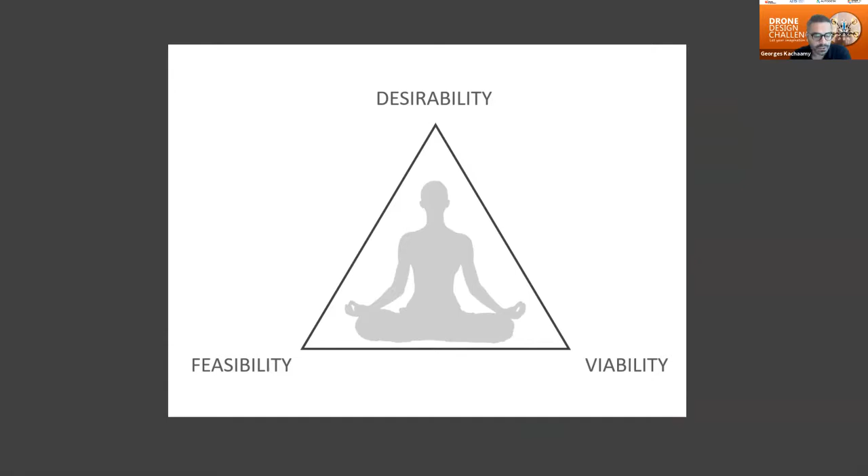What I admire the most about the UAE in general and Dubai in specific is that this place truly manifests Mandela's saying that it always seems impossible until it is done. So please, whenever you feel demotivated and not wanting to continue, always remember this sentence and never give up.

One might say, yes, making a drone fly is one thing, but a building, of course, it is something else and it's impossible. But it seems one guy disagreed when he said, if you can levitate a train that weighed 50 tons, why not a house?

And here where my challenging journey has started, you see, I always been fascinated by the celestial bodies, the moon, the sun, the stars, and always wondered how can something that massive be floating like this in our skies? Of course, science explained many of these things, but it did not deter me from keep wondering.

I was not the only one and will not be the last. Many before me and many after me will still be fascinated by that and will still contribute in this ongoing research on how we can defy gravity and liberate ourselves from it.

One of the outcomes that took the attention of the public was the Rising Oases series of prototypes that I usually do: the spring, the river, and the waterfall. These series are prototypes that came out of the ongoing research that I'm conducting to date.

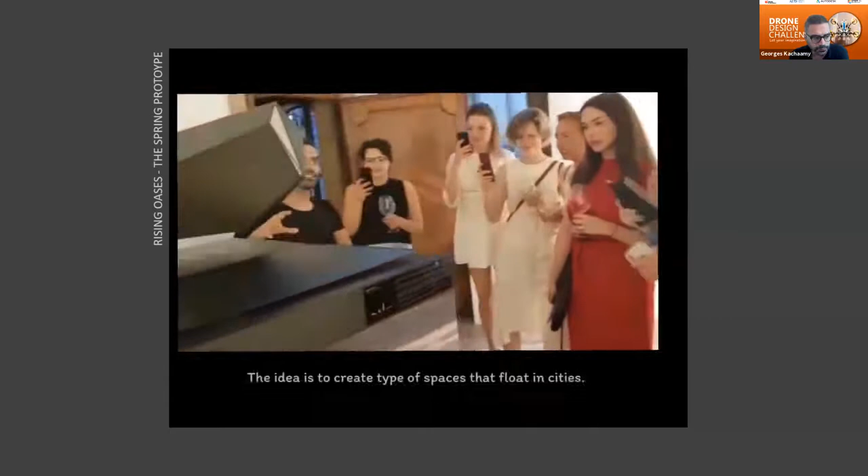So this is actually one of the exhibitions where it shows in Venice, it shows one of the prototypes floating. The other one that actually was done here in Dubai Design Week.

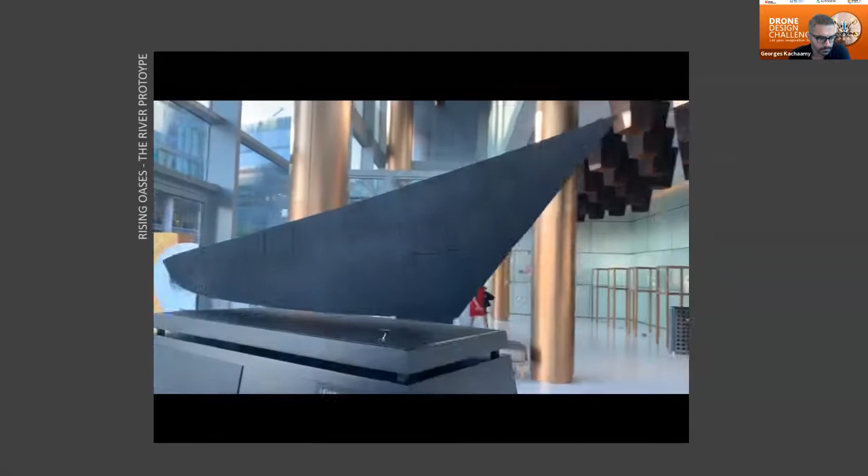The third one is actually still ongoing, and for this one we did a bit of a different way of exhibiting it because of the pandemic and the situations we are all in. We generated a prototype that was virtually built in a virtual city, where you can use virtual reality and access it and see it at one-to-one scale. This gives a different experience because of the situation that we are in. This is a small animation of it.

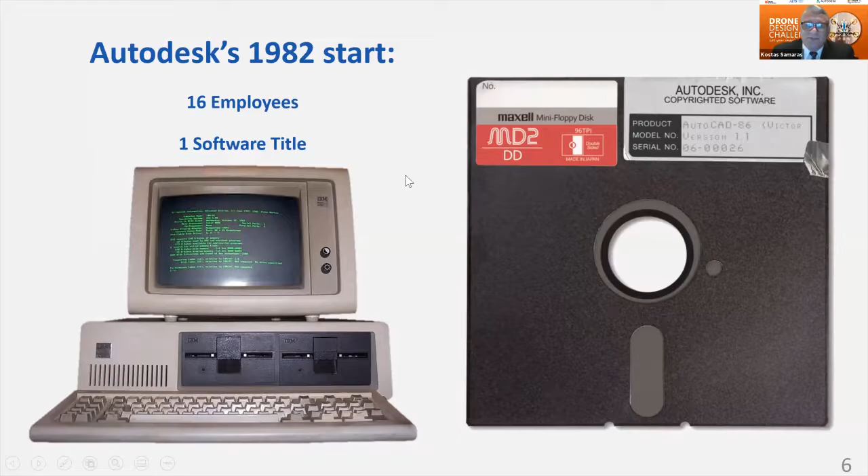Right now, as a company, we're about 14,000 employees worldwide, and we have more than 300 design software titles available, and Tinkercad is one of them.

Now, what Autodesk is doing for education - I have quite amazing and exciting news for all the students, the parents, of course, the schools, and the teachers.

So our contribution to education: we provide free access to all our software, and the software is very professional type of software. All our software is free of charge for all students, whether high school students, primary students, or university students. All our software is free of charge to download.

We have free learning resources, and we provide free training for teachers and educators. Also, we have several workshops and competitions, and we've created a student expert program, as well as some sponsorships.

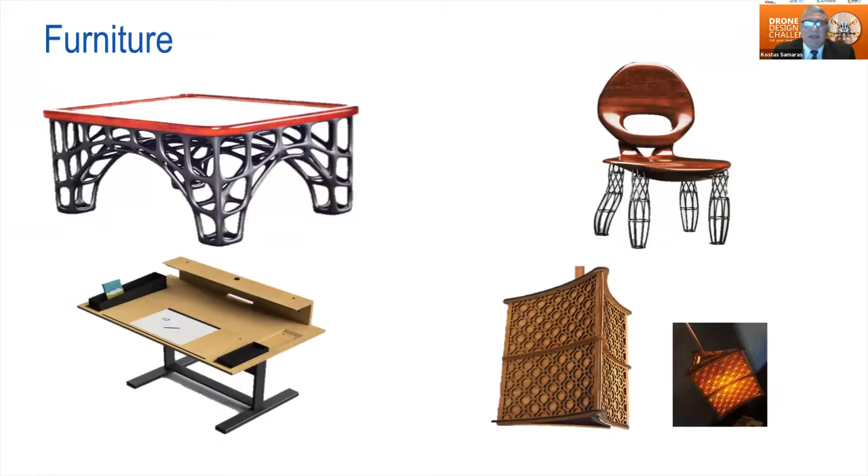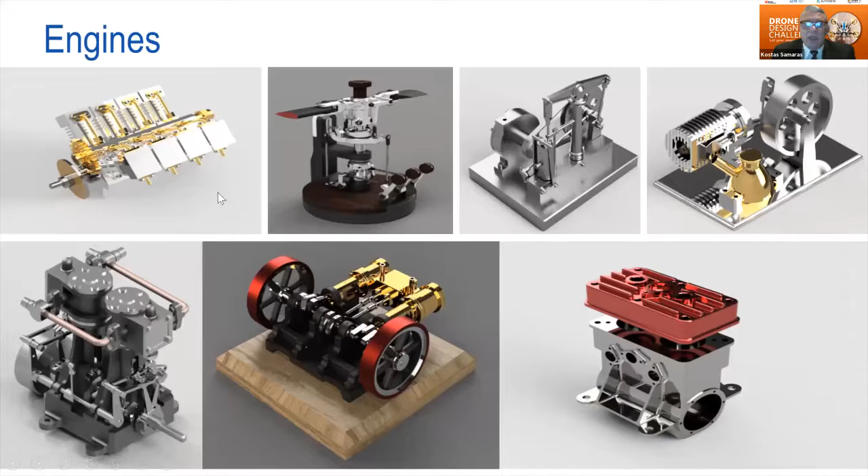And I would like to close with another video just to show you that nothing is impossible and you can design everything.

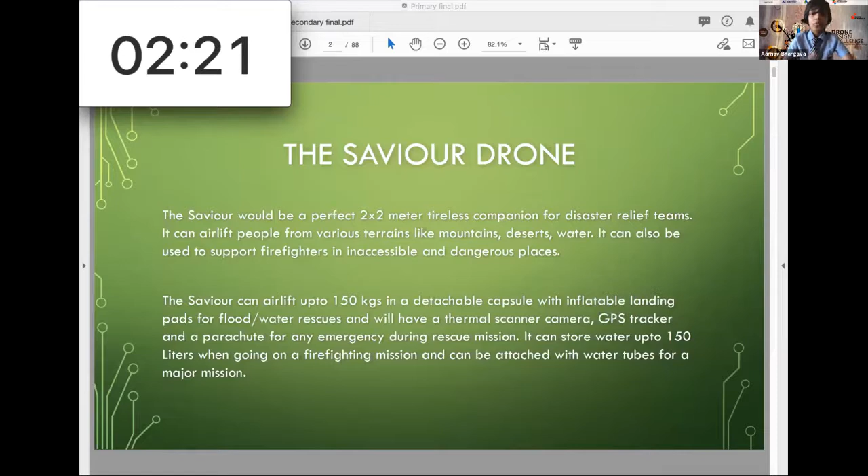The drone can store up to 150 liters of water in the detachable capsule when going on a firefighting mission, and can be attached with water tubes for a major mission. The flight controller will have an option to remotely open a staircase so that the person can easily enter the capsule once the drone lands.

Here are some details of my drone. The Saviour will be a hybrid X drone with just 2 extra rotors, making it a hexacopter instead of a quadcopter, for better stability so it can carry more weight. It will use the underslung and separate arms frame. The Saviour will have one drone frame, 6 motors, one flight controller, 6 propellers, one battery that can run for up to 8 hours when fully charged, one transmitter, one receiver, one thermal camera, and one GPS tracker.

As you can see, there's a tube-like structure which is used to spray the water. Then you can see an antenna, which is the receiver, and the 6 propellers. After that, you can see the 6 legs under the capsule, which are the inflatable landing pads, and that tiny camera over there.

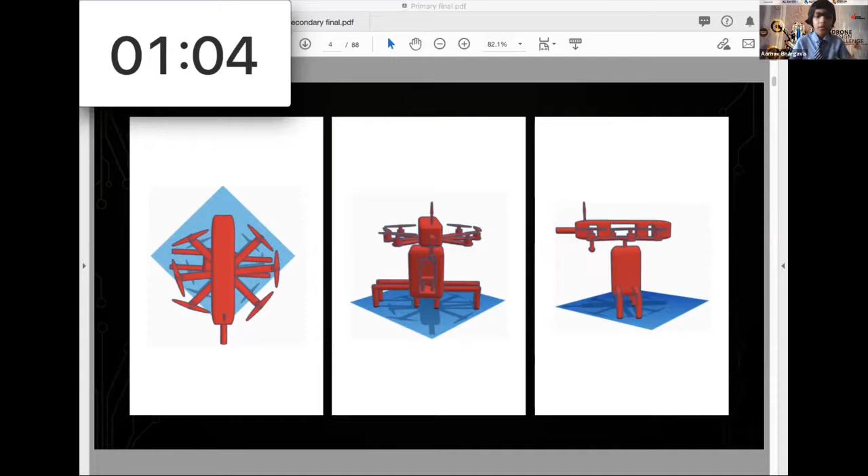In the first picture, you can see a tiny circle at the extreme bottom, and above that an even bigger circle. That is for connecting the water pipe for the firefighting mission. Thank you for listening to me.

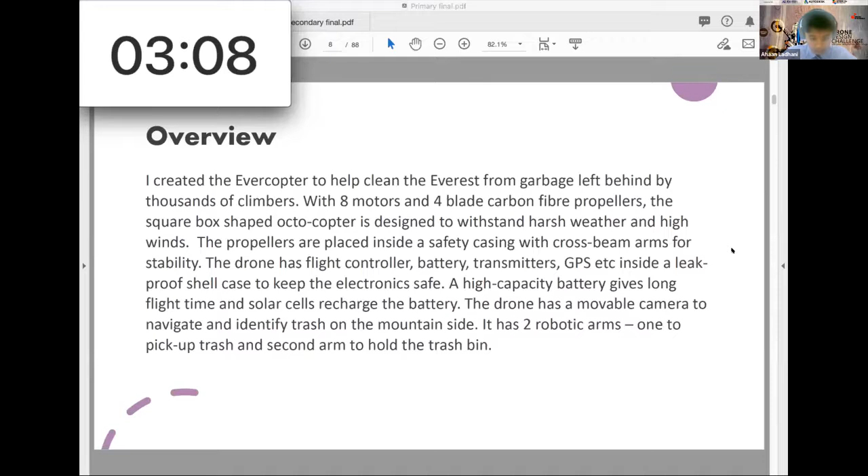Evercopter is a drone designed to fly in high-altitude places like Mount Everest. It's a square box-shaped octocopter with 8 motors and 4 blade propellers. The propellers are made of carbon fiber and placed inside a safety casing with cross-beam arms for stability to withstand harsh weather and high winds.

The motors produce enough thrust to lift the drone to high altitudes where the air is thinner. The drone has a flight controller, battery, transmitter, GPS, etc. inside a leak-proof shell case to keep electronics safe from rain, snow, and temperatures below 0 degrees. The high-capacity battery gives long flight time, and solar cells recharge the battery.

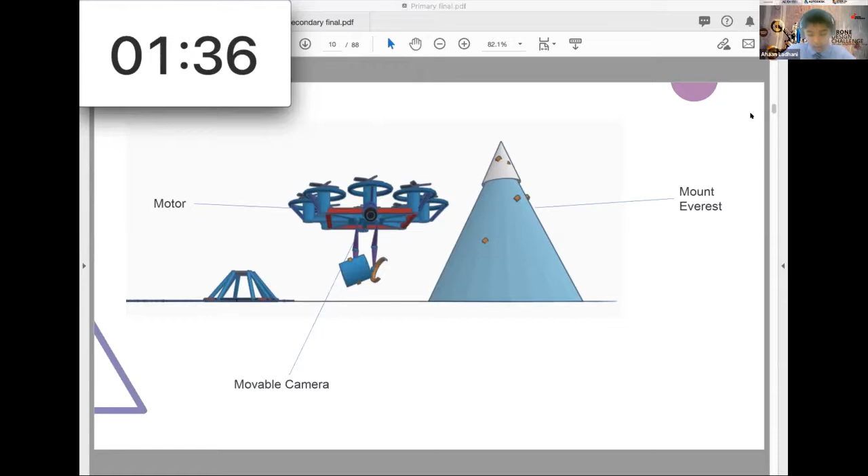We can create swarms of Evercopters which can clean large areas quickly with almost no human effort. I think this is the way forward to save our environment in a clean, non-polluting way. Thank you.

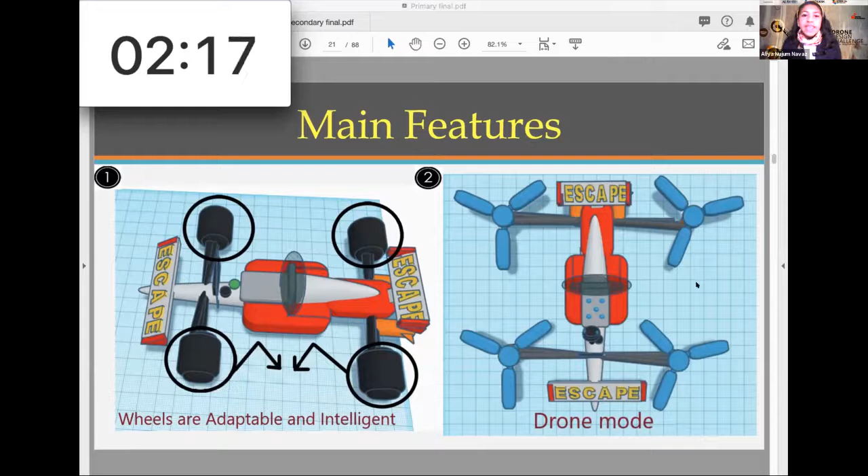Plasma thruster propulsion can help the drone move at relatively high speed. So that means if I want to go from my place, Al Ain, to Dubai, it will take me approximately 3 minutes. Isn't that cool? My car is equipped with augmented reality displays that project the speed of the vehicle, GPS routes, and even project obstacles or vehicles ahead, to the side, or at other angles the driver needs to know of.

The AI-enabled camera has various purposes. First, to detect obstacles while hovering. Second, to observe climatic conditions and make decisions - say it is raining or there's a windstorm. In this case, the drone can smartly decide whether to fly, go to driving mode, or park. Third, ensure safety while landing - with computer vision, the drone detects the terrain and makes a decision autonomously for safe landing.

In car mode, when it detects a collision ahead, the AI with help of sensors activates the drone mode. But in case a collision happened, the AI drone will activate what I call the flying safety pod, which secures the driver and flies to safety. This is the inspiration for naming my dual mode smart car, the Escape.

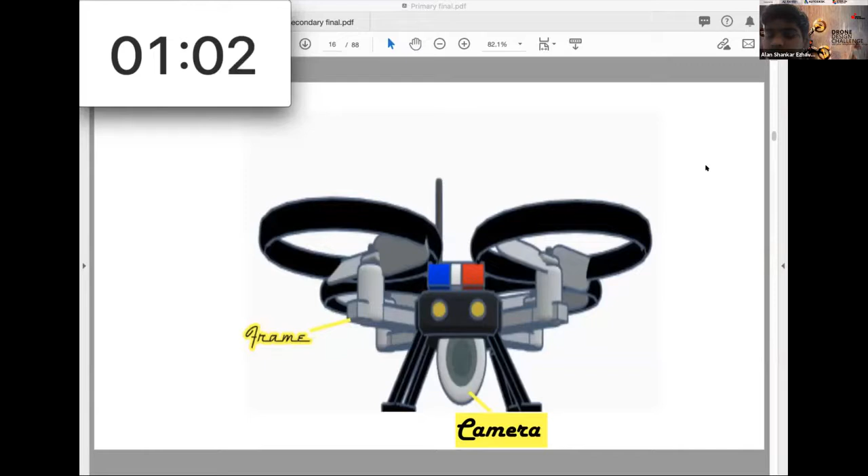I also have a fixed frame and a camera below the drone. Next slide. Thank you.

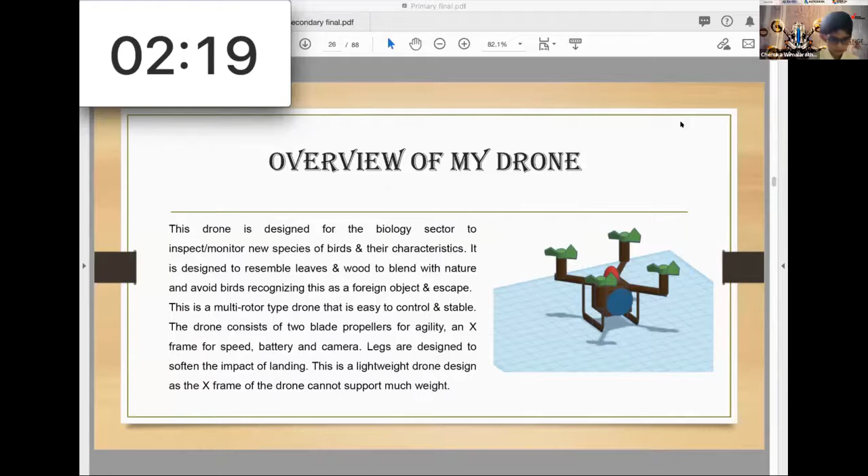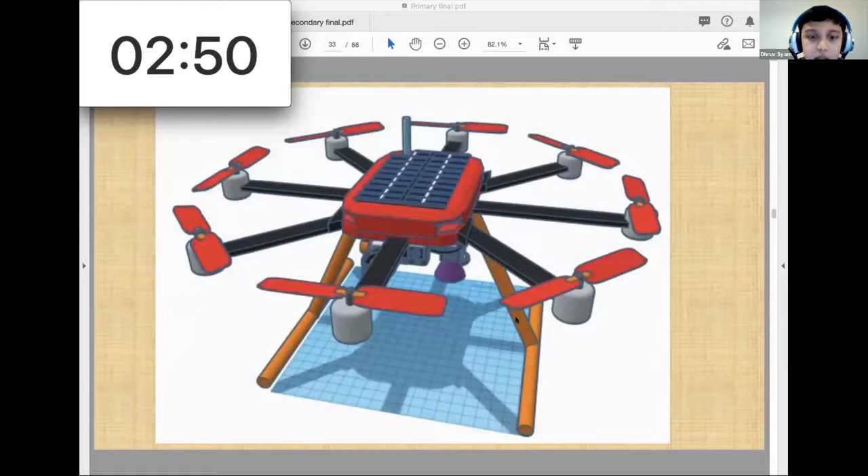These are the components of my drone. There's a radio frequency antenna so there will be no issues in the range of frequency. I have used 30 MHz frequency so it can travel longer distances without range problems. Then there's a solar panel, which gives extra charge to the drone even during flight. I have used 500-watt motors so there can be enough lift thrust for the drone, and two bladed propellers to produce the lift.

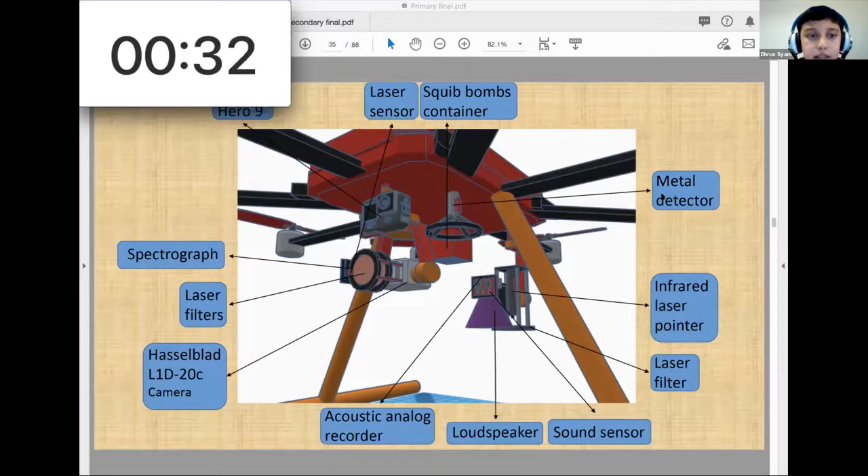Thank you for your attention.

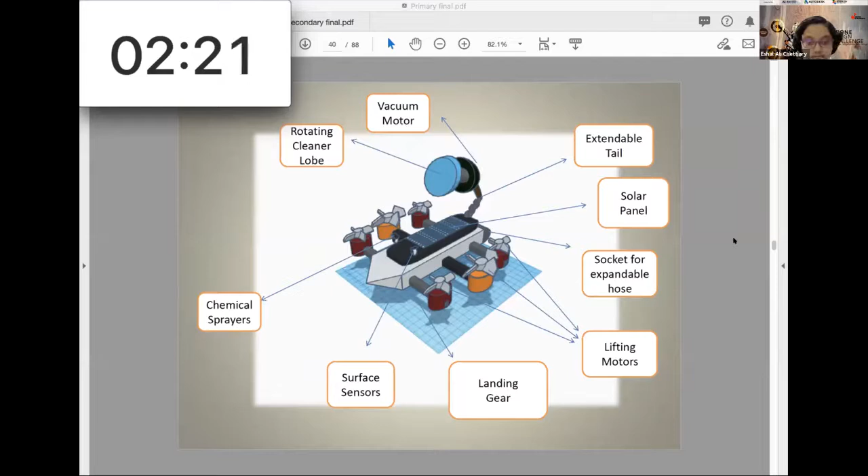Next slide. That is everything to know about my Scorpic Cleaner. Thank you.

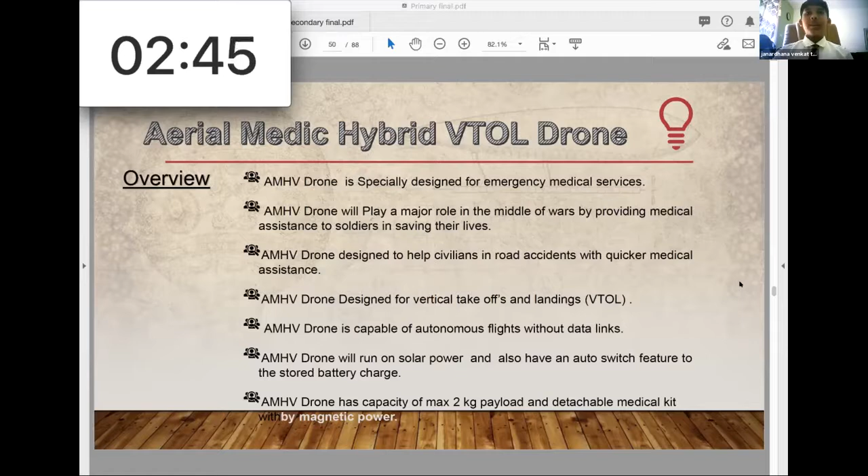The drone is designed for vertical takeoffs and landings, also known as VTOL. The drone is capable of full autonomous flight without data links. The drone will run on solar power and also has an auto switch feature to the stored battery charge. The drone has a capacity of max 2 kg payload and detachable medical kit with by magnetic power. Next, please.

This drone will be very helpful for saving many lives. As we all know, the most important thing for us is to save lives. Thank you, everyone. And my special thanks to the drone school teams for giving me this opportunity.

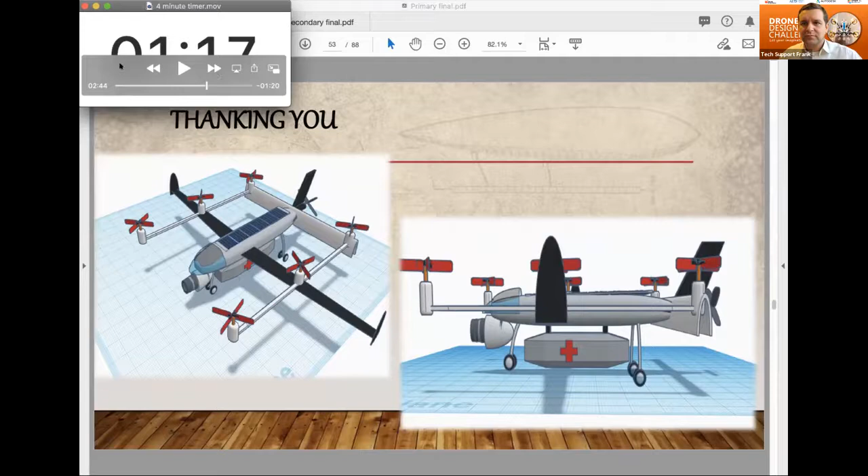Good morning, everyone. My pleasure to present in front of you today. My name is Layan Almaskari. I'm 10 years old. I'm from Oman and I live in Bahrain. I'm in 5th grade and I study in Naseem International School in the Kingdom of Bahrain.

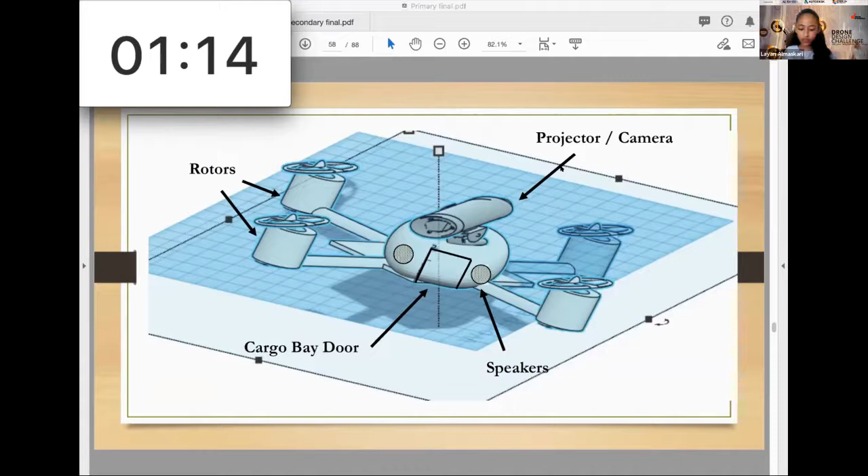Healthcare and relief workers can use it, as well as organizations and even relatives and friends. It will help us say that we are here for each other, we are strong together, and we will share this beautiful life with you. After all, the joy of living is giving.

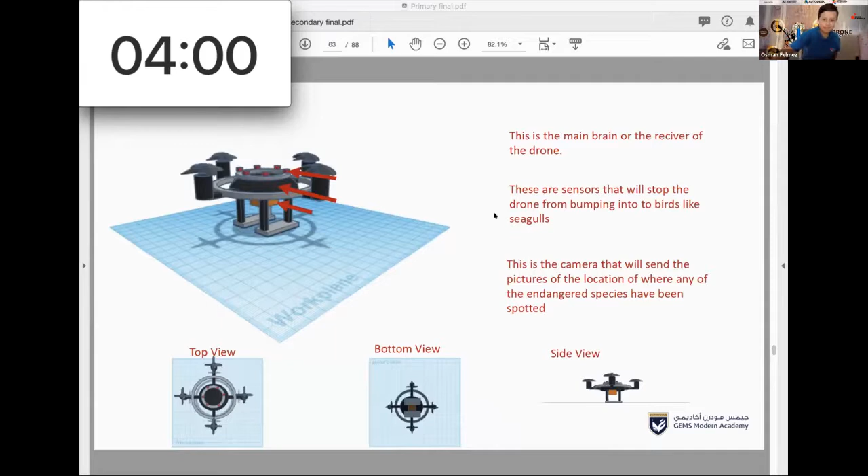Overviewing my drone, Patrolcopter. My drone's name is Patrolcopter. Its job is to help police patrolling dark areas of cities at night so people can walk freely and safely. This drone is a multi-rotor drone, quadcopter type. It has a stretch X shape frame and 4 propellers. Also, it has 2 long-lasting batteries and a night vision camera. Also LED, which will give a signal when danger is detected.

I hope it will be really useful. Next, please.

4-blade propellers for the highest thrust. I chose 4-blade propellers so it will generate the highest thrust so it can go for high altitudes. Next, please.

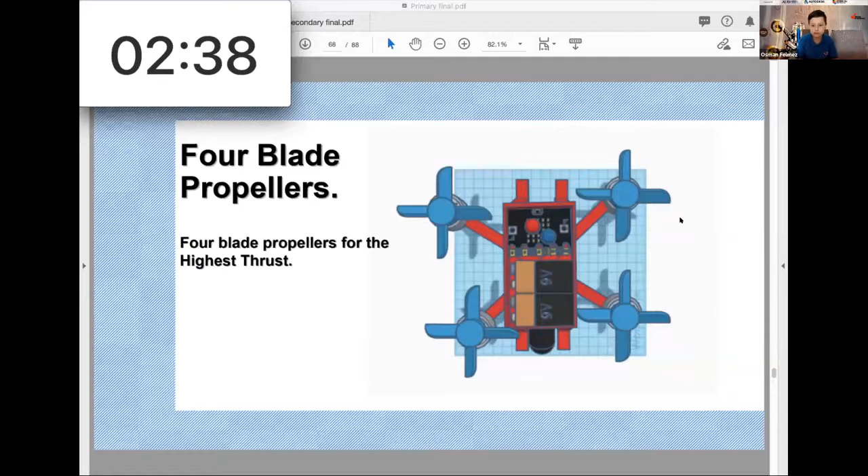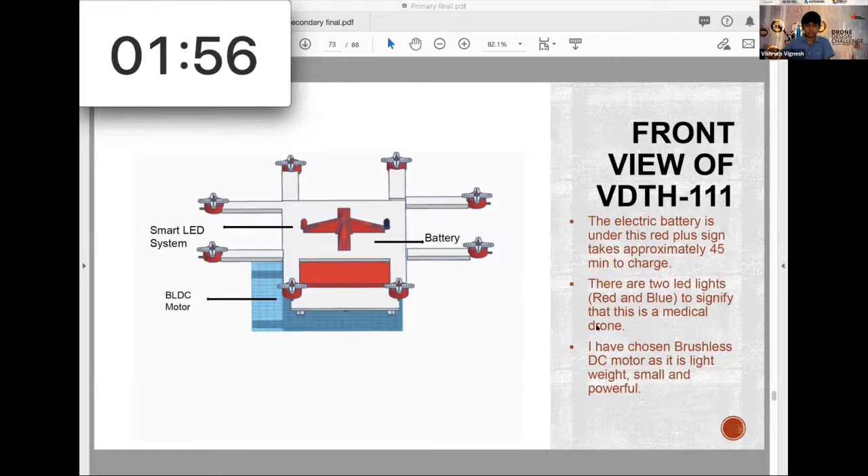I have decided to use an electrical battery for my drone, located under the red plus sign, which takes approximately 45 minutes to charge. There are 2 LED lights, red and blue, to signify that this is a medical drone. I have chosen to use a brushless DC motor instead of a normal DC motor as it is lightweight, small, and powerful. Next slide, please.

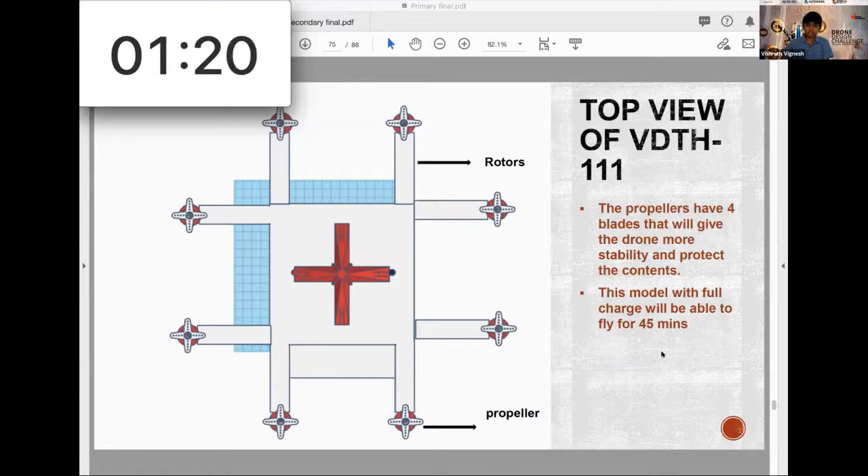Next slide, please. The propellers have 4 blades that will give the drone more stability and protect the contents. This model, with a full charge, will be able to fly for 45 minutes. Next slide, please. I would like to end the presentation by saying that the right idea will fly, and make...

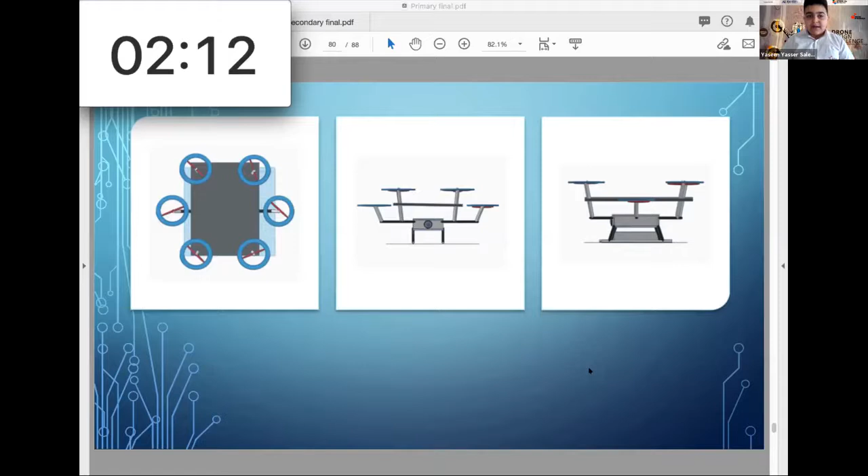From the backside view, it contains components necessary for flight, such as a slide-in battery pack and a motherboard. It has a radio antenna to receive signals from the controller, and a GPS system to locate where the drone is and return to home position when mission is complete, and auto land in case of emergency.

Next slide. My drone can be used for delivering packages faster, and because of the hexacopter's powerful motors, it can be used to discover hazardous and remote places which cannot be accessed by humans. It can record and observe surroundings. Thank you for listening to my information.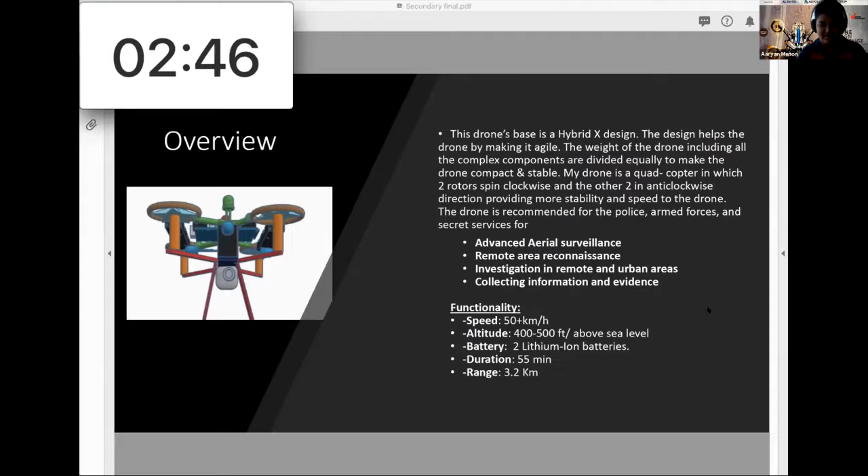So first, I will explain the landing flaps. This drone consists of two landing flaps, one on each side. It is lightweight and made of aircraft aluminum, providing steadiness and support to carry every other component in the drone. The dimensions of these flaps are length times width, 36 times 15.12 inches, and a height of 70.32 inches.

Now let me explain one of the other important parts, the camera. This drone has a built-in DJI Mavic 2 Zoom camera, the best camera available for surveillance. It is lightweight and attached to the drone itself. It has an enabled 360-degree spin with a 24x zoom ratio for a clear and crisp view. The camera is also thermal night vision enabled, and can record videos which can be directly relayed to headquarters using an inbuilt 4G SIM. Next slide.

So now I'll be talking about the rotors. This is a quadcopter, a hybrid design for speed, agility, and weight distribution. The rotors are fixed inside rotor rings connected to the drone frame for better functionality, so that it does not fall out. The drone consists of 4 rotors, each with 5 blades, totaling 20 blades for even faster thrust and speed.

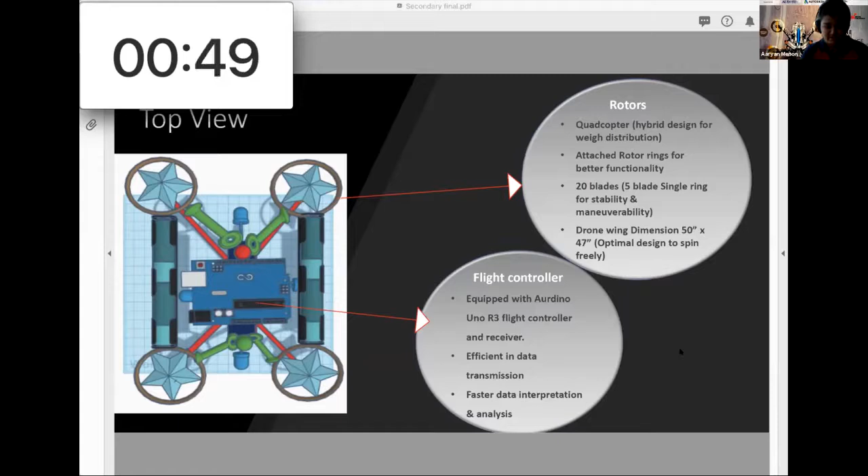Now I'll be explaining the light indicators. Next slide. On the right hand side, we have a 2 LED 10mm light programmed to produce a green light, which indicates smooth functioning and proper data relaying. On the left hand side, we have a red light of the same type, which indicates turbulence, low battery, and signal disruption.

Now I'll be explaining the motor. This drone has a 2x AA PCB motor attached vertically. This is an enhanced design for longer flights. It is powered by 2 battery units inside the Hybrid X frame. The motor has a dimension of 107.44 by 15.93, length times width.

And finally, the searchlights. I won't take much time, it's only 20 seconds. The searchlight is the last component of the drone, a 4 LED light attached to each side of the drone. It produces white and blue light for better visibility. It is side mounted to get a clear view of the ground and helps in night surveillance. It is also powered by the batteries. Thank you so much for paying attention to the drone.

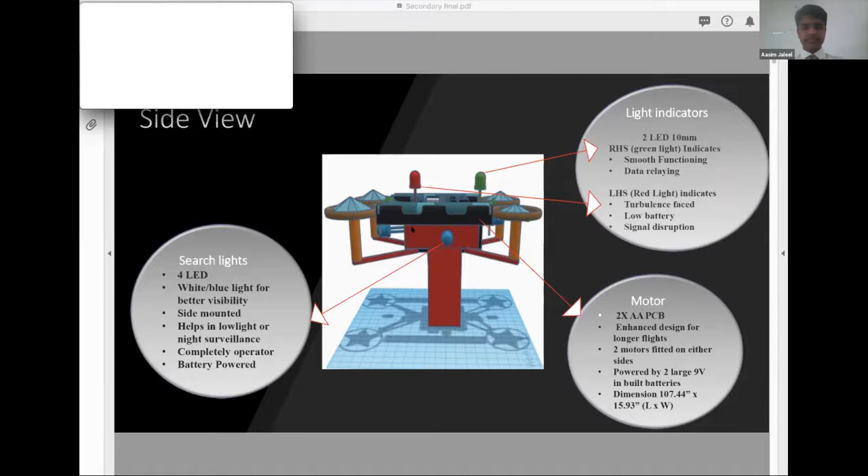Good morning, one and all present here. My drone design is to give wings to my imagination. Scientists have discovered that it rains diamonds on Jupiter and Saturn. But what they forgot is that it rains something even more valuable and precious here on Earth. Yes, it is water. Life began with water. Life is sustained by water. And life itself is 60% water. Yes, water is so important, and so is rain, which is the source of fresh water on Earth.

Next slide, please. We know a lot of people, let alone farmers, who look forward to water droplets falling from the sky, who desire to feel the cold climate with a cup of hot coffee, and who wish to see their country green. Unfortunately, there are so many countries in this world that do not get to experience this blessing. Without rain, we cannot harvest crops. There will be a rise of temperature and there will be droughts, severe ones. In fact, the Great Famine of Russia passed only after 5 million people lost their lives. In simpler words, a country cannot prosper without rain.

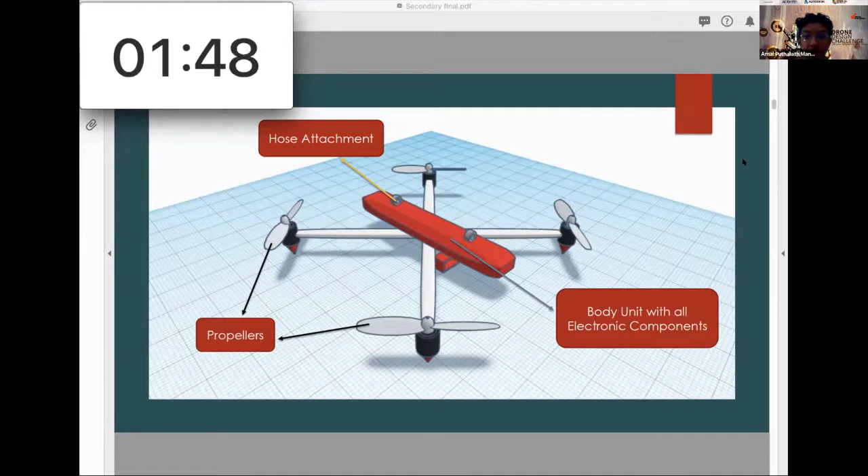The drone will be powered by a battery, which is also on ground level and will be connected by a cable. In the future, with advancement in technology, drones will be able to do things that we have never thought of before. Thank you.

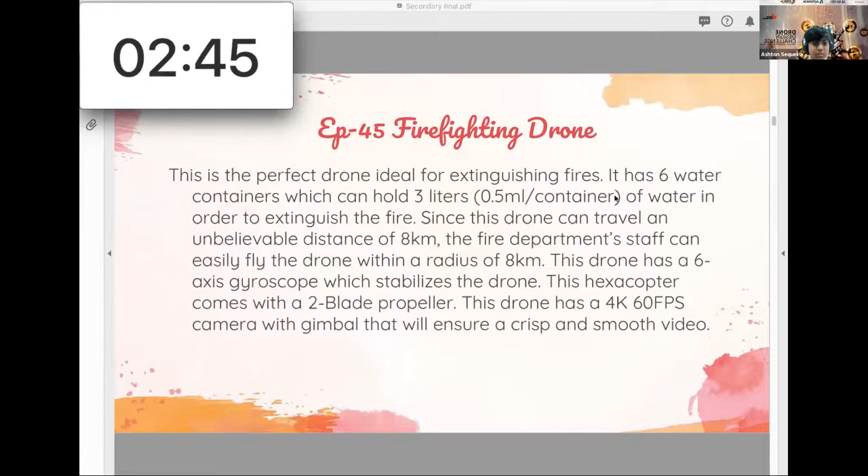Now this is the overview of my drone. First, we have the water holder. It can hold a total of 3 liters of water and each container can hold 0.5 liters. Next, we have the underslung 4K camera. It comes with a gimbal for good stability and can shoot videos at 4K, 1080p, 720p with an option of 30 and 60 fps.

Next, we have the battery holder, the water hose, and 2-blade propeller. The battery holder can hold a 15.2 volt, 2000 milliamp battery. These are the item dimensions, and the net weight is approximately 443 grams. Next, the 2-blade propeller maintains balance between battery and efficiency. And at last, we have the water hose. Water is ejected through this pipe, and the force of the water can be controlled by the pilot.

By this, I conclude my PowerPoint presentation. Thank you.

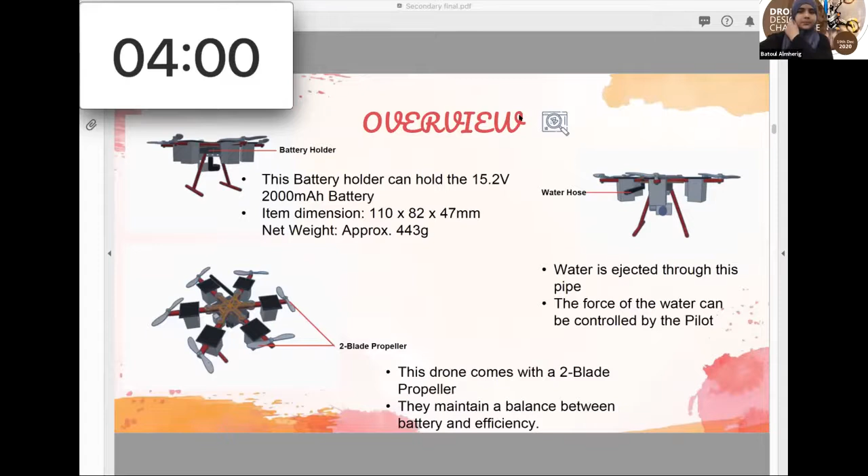Welcome to my design that will impress you all. I am Batoul Umar Almherig from Libya and reside in the United Arab Emirates, and I'm from the American School of Creative Science Maliha, from 9GD L2.

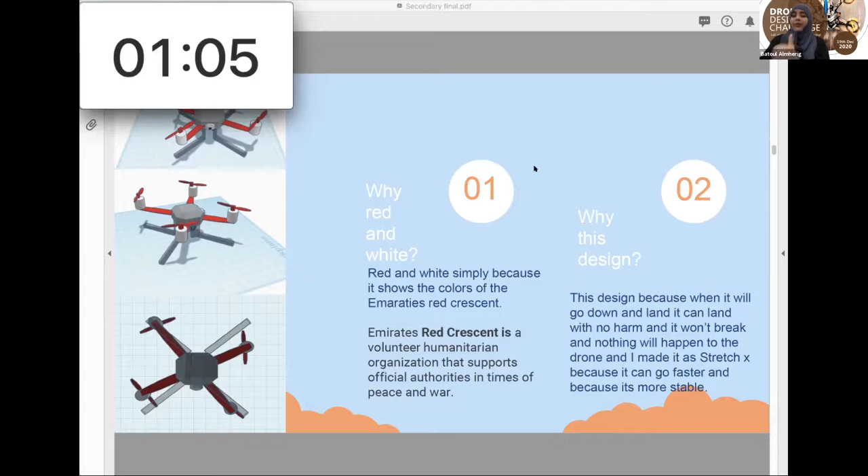Second of all, why I chose this design. This design because it will go down and land, and it can land safely with no harm, and it won't break. and nothing will happen to the drone, and I made it as a stretch X because it can go faster and because it's more stable.

Finally, I hope you share my design so it can help the world.

Thank you, and I would like to thank my family for helping and supporting me, and I would like to welcome any questions.

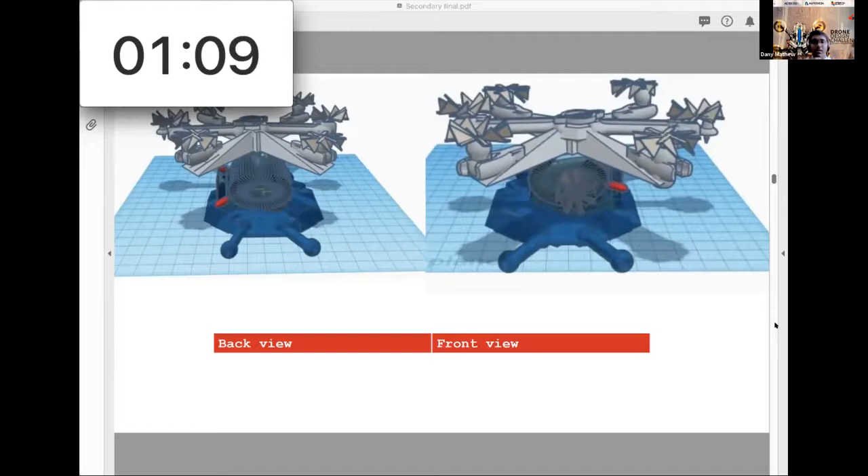You can see my design, where I've used two antennae also in the front, and it's a Hybrid X version of a drone. It seeks more stability on the pitch axis and not on the sides, because it has to travel with air currents. Next slide, please.

So the details about this drone: it collects radar images of a sea or ocean at a particular season of the year to determine changes in water currents. It follows the path of water currents and moves with velocity in the same direction relative to it. Its aim is to observe and mitigate the effects of climate change in local seas and oceans. Additionally, the servo motor provides the ability to move control surfaces and control speed of individual motors to achieve aerodynamic control.

Let's see what a servo motor actually is. A servo motor allows for precise control in terms of angular position, acceleration, and velocity, and it has capabilities that a regular motor does not have. This device also uses a regular motor, pairing it with a sense of position feedback.

Turbines in the front provide extra renewable energy for long-term flight. As you can see, I've put my turbines in the front. The drone frame and body is made of lightweight, corrosion-resistant material, and it is autonomous, with communication to weather stations.

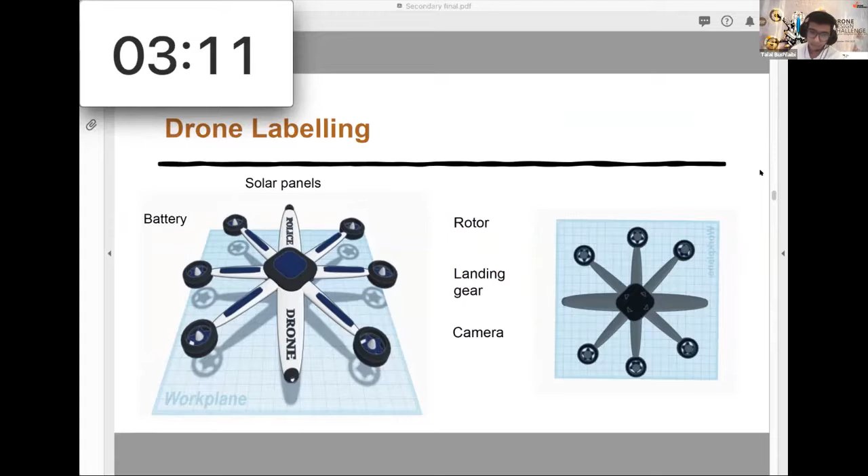I'll talk about the design and purpose of our drone. Our drone is a hexacopter, so it can move extremely fast while being agile at the same time. It has a greatly wide wing, which increases stability and may come in great help if one of the rotors fail. It uses solar panels, so it's technically friendly to the environment. We chose it on purpose to help police surveillance in some towns and increase productivity. It has a storage device with 2 mounted cameras to store everything that it sees.

Now we're going to talk about the specialty of our drone. The 6 rotors are estimated to run the drone at a minimum speed of 45 kilometers per hour, based on our research that each rotor gives 7.5 kilometers, then we times by 6, so we get 45 kilometers per hour. With that speed, it's enough to follow a medium speed moving target, so in this example, a family car, so it can take footage of everything that it can see.

And the drone is made of one piece, so it is very hard to break, and it is extremely lightweight because it consists of carbon fiber and reinforced polyethylene. Thank you.

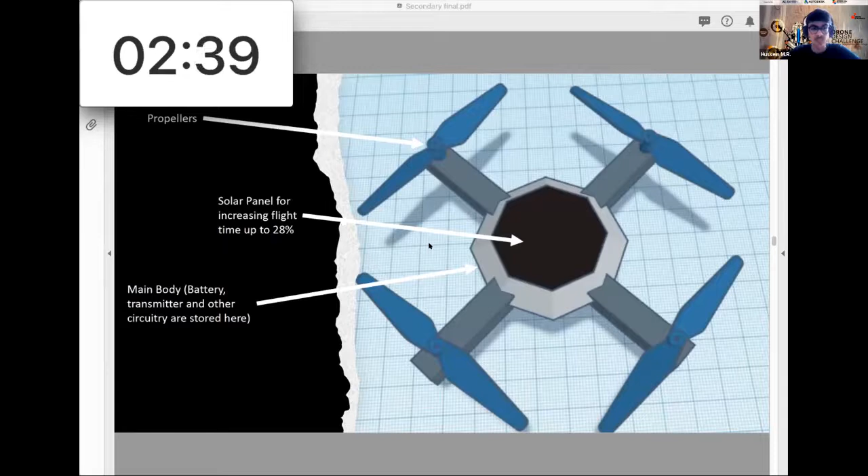Next slide please. Extras: we have a phone holder for the drone. The camera can be unscrewed and the phone holder can be screwed in place. Then we can attach our phone into the phone holder and send it into the air for features such as high quality photos and videos, live streaming for social media, etc.

We will also have a companion app for the drone, which will add extra features such as subject tracking, battery levels, real-time video transmission, hover, return home, time-lapse videos, beginner's guide on how to control the drone, etc. We'll also have obstacle avoidance for keeping the drone safe, especially in dangerous situations such as mountains and rocky areas.

The drone will also have a GPS chip. In case the drone gets lost, we can use the last received GPS coordinates to retrieve it. Next slide. Thank you for listening to me. These are the sources and references of information which I've used.

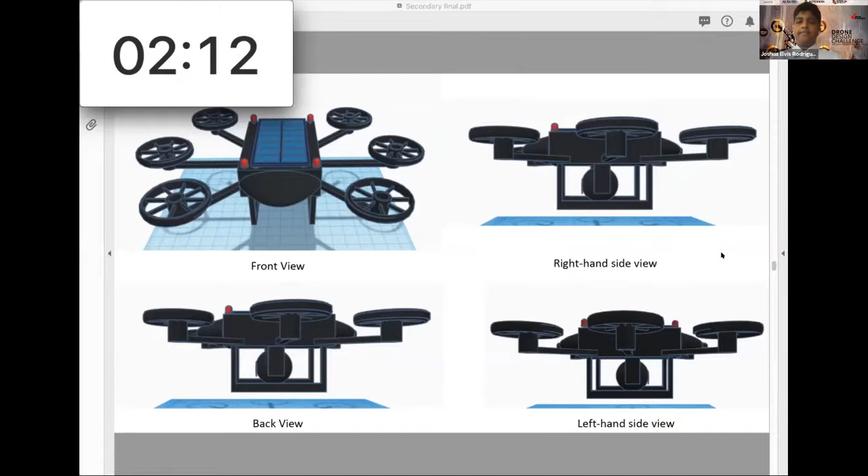So this is about the thermal imaging camera. You can see it's a sphere, and that helps it rotate better. I've added the paraboloids, as you can see in the bottom right. Those are the cone-shaped things, and that helps it decrease the air resistance.

In a situation where it could be totally windy because of the decreasing and changing wind speed due to the different heights of the buildings, this is going to help it stay stable.

I have the LED lights, and this is to save energy because normal lights take more energy per second, which is not helpful. The LED light will also aid the people controlling the drone to see in dark or dusty conditions.

The rotor has 8 blades made of carbon fiber. I specially designed it to be carbon fiber because it cuts through wind better, meaning it transfers most of the energy from the wind into helping us thrust or propel. Thank you.

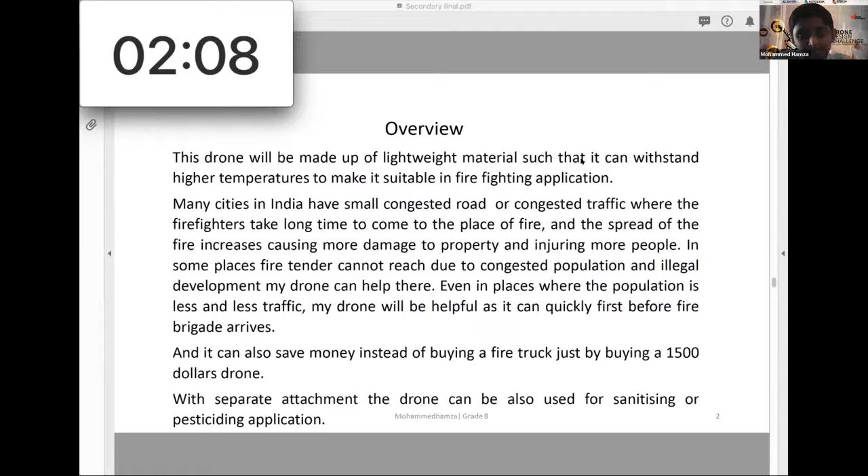Next slide, please. It will be better if 5 to 6 drones are in one area, because even if one drone fails, the other drones can still continue fighting the fire.

I recommend my drone because if a human firefighter goes inside the fire, he has a chance to die. So why risk a life when a robot can finish the job and save someone? The fire also generates poisonous smoke that can kill people. My drone uses thermal cameras with infrared technology to detect unconscious humans stuck in the fire, and then firefighters go to that location and bring those people to a safe place. Thank you.

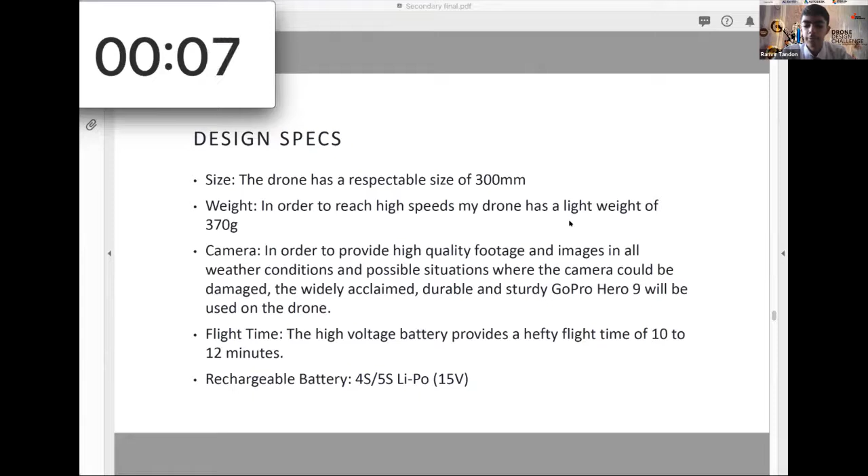Flight time: the high voltage battery provides a hefty flight time of 10 to 12 minutes at its highest speed, and has a rechargeable 4S to 5S LiPo 15-volt battery. Thank you for listening.

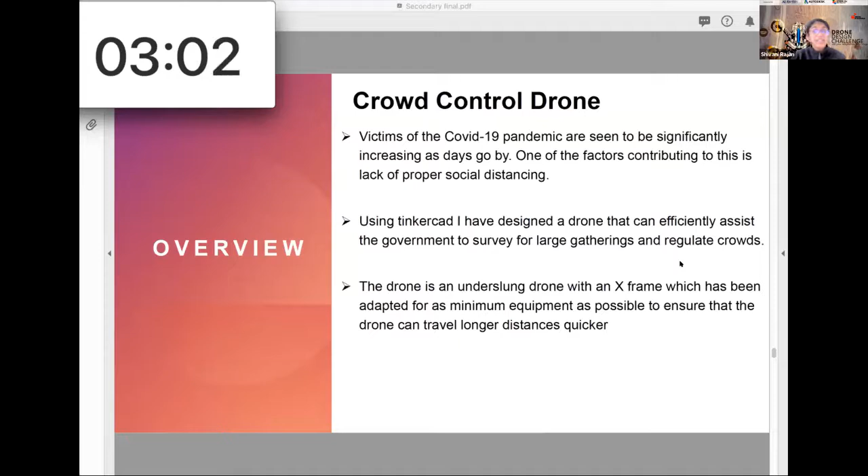This drone contains 4 propellers and is a multi-rotor drone. The X-frame allows the drone to travel much faster, giving it a better advantage over other drone types. It also provides more stability to the drone as the perpendicular distance between the center of each motor is equal. The center of the drone frame is not hollow, again increasing the stability.

The AI-assisted camera is placed under the drone frame to allow a 360-degree view of the surroundings. A ring has also been implemented above the camera to ensure the stability of it. So even if the drone tilts, it provides better footage from the camera. Next slide, please.

Drones can be very hard to control and can incur heavy damages. To prevent this, the drone has been provided with suspensions that can absorb the shock of an impact or a crash landing. Rubber bases have also been implemented to reduce any damage done to equipment. The drone is also underslung for the same reason. 4 sturdy legs have been provided here.

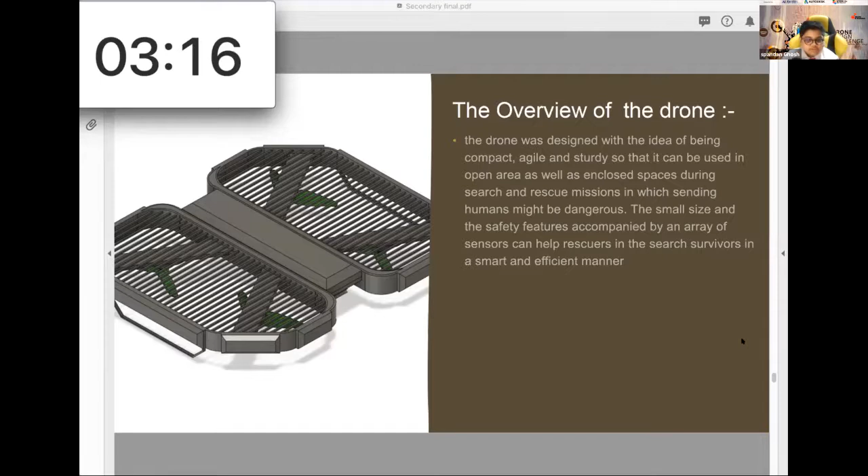Ma'am, next slide, please. Now let's come to the technical aspects of the drone. The frame: the drone is based on a hybrid X frame, which allows it to be agile and be able to carry heavy payloads.

The hybrid X frame is also accompanied with a distinct outer frame that has foam padding on the edges, which protect the propellers and electronics from damage. There's also a mesh-like structure on top of the motors and the frame itself to prevent falling debris from damaging the motors and propellers. These grid-like structures are designed to be aerodynamic so they don't interfere with the flight dynamics of the drone.

The eyes of the drone, the sensor unit itself, has 3 LiDAR sensors and 2 cameras. The LiDAR sensors can help ground control make a digital model of the surroundings so it can help them decide the next plan of action. The camera, one of which is an IR camera, can help find survivors during the day and night. The other is a conventional high resolution camera.

The other being a conventional high resolution camera. The LiDAR sensor can also help detect walls and prevent the drone from crashing into them. Next slide, ma'am.

Since the drone is a search and rescue drone, it needs to be in contact with ground control at all times. Therefore, the whole upper part of the drone is designed to be a huge antenna, which also allows for long range communication. The drone itself is equipped with a GPS guiding system, so it can navigate autonomously and even engage to return to launch if it loses contact with ground control.

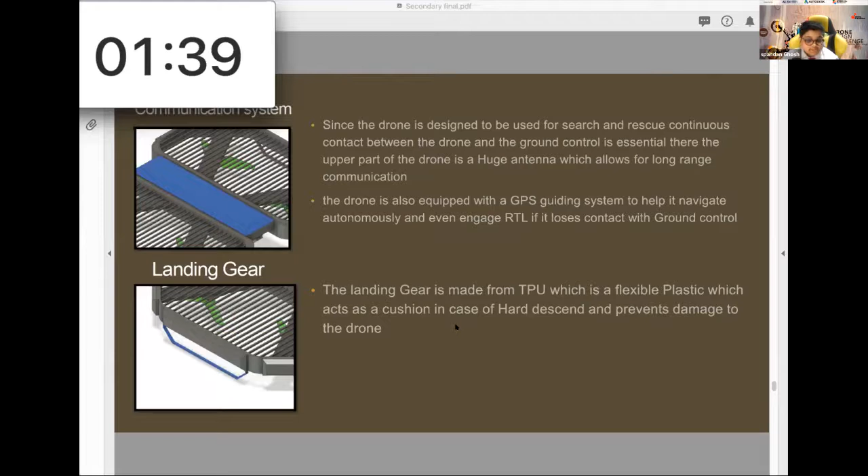Landing gears are made from TPU, a flexible plastic which acts as a cushion or shock absorber in case of a hard descent, preventing damage to the drone electronics and the frame. Next slide.

The main feature of the drone itself is the inverted motors. While the drone is flying, it was taken into consideration that falling debris might hit the drone and render it useless. To overcome this problem, I've designed the motors to face the bottom with a grid-like structure on top. So even if debris hits the drone, it will still be able to fly.

And if it needs to stop, it can come to a safe stop without crashing or endangering people. Also, the inverted motors allow it to fly higher towards the ceiling, allowing the lidar and camera to cover far more range. This helps the ground controller find survivors more accurately. If survivors are found, the drone can land safely and prevent people from touching the propellers and getting injured. Thank you for listening to my presentation.

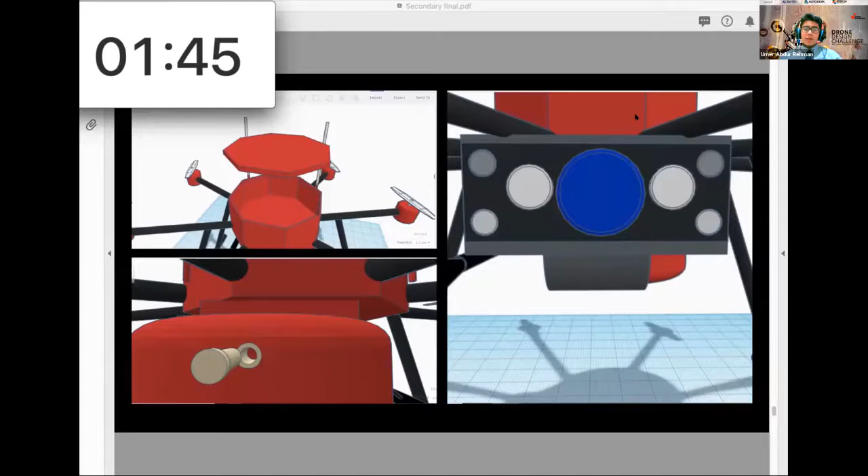And finally, there are also two sensors which tell the drone if it is getting too close to the fire. The hole in the back of the tank can be opened and connected with a hose to the ground tank, so it can hold more chemical. Thank you.

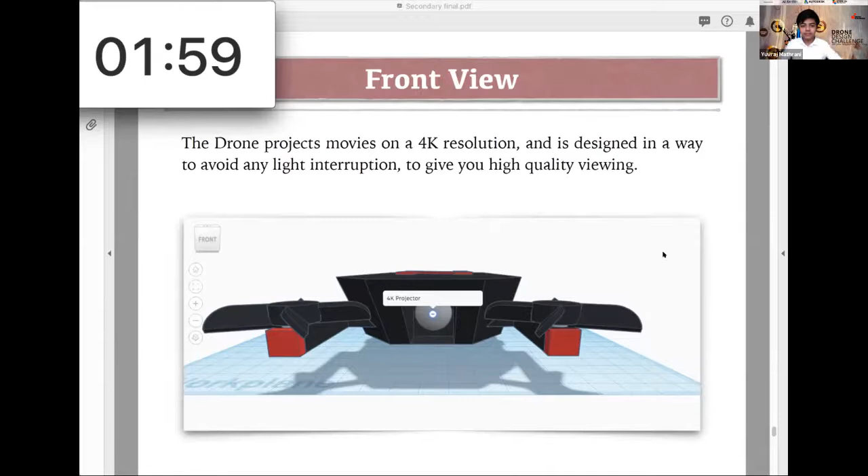To make the drone more aerodynamic, it will be 1 gram less than the lightest drone already, which is 249 grams, which makes the drone reach faster to your destination.

Now, having just a projector costs more than $300, with an additional $200 roughly for a Netflix account per year. If you buy the N drone, this will all be provided to you for a reasonable $400. This gives you the true opportunity to sit back, relax, and Netflix and chill. Thank you.

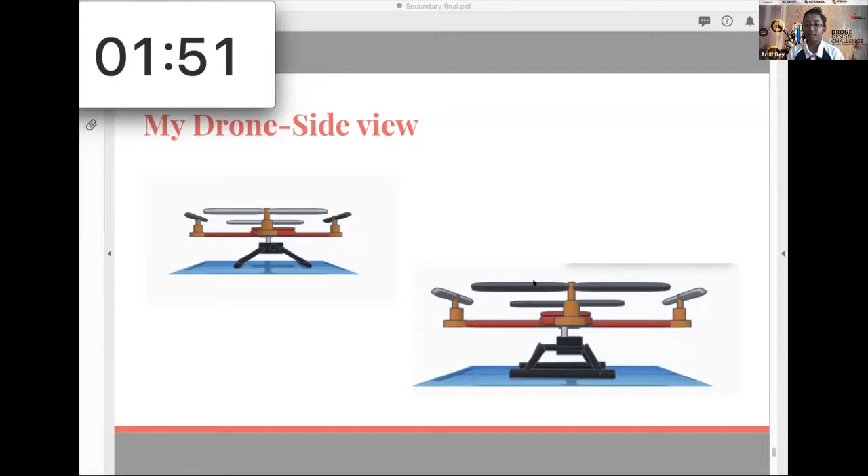Next slide, please. And last but not least, the details of my drone. Rotors to allow it to fly, extendable rod to allow microphone and camera to reach the ocean surface. Camera and microphone, waterproof, will extend and use echolocation to map the ocean floor. Parts of the drone such as the battery, receiver, and flight control. Landing gear allows the drone to take off and land smoothly. Also waterproof and can land on water and withstand tidal waves, made of carbon fiber.

Thank you for watching, but before I end, I have a couple more points about my drone I need to talk about. It will be equipped with GPS so you can see wherever your drone is. Also, I didn't make such a complicated design, so it's economically viable to scientists and researchers and will not affect the environment in a harmful way.

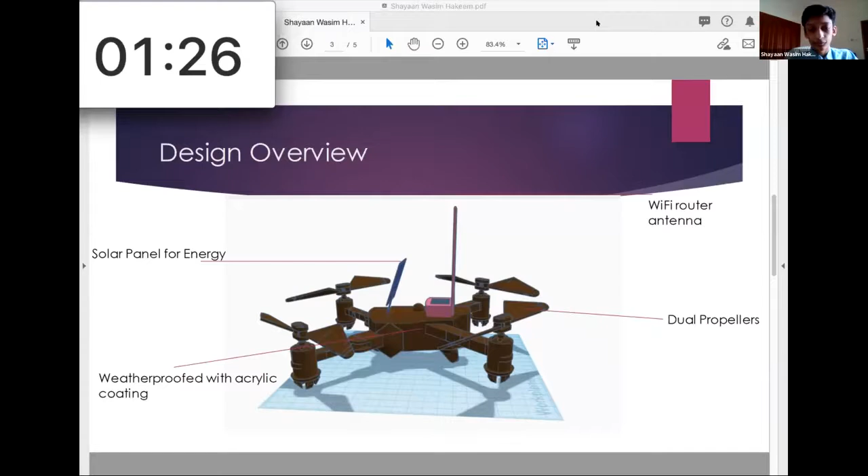The hull is weatherproof with acrylic coating to provide safety from rain strikes, weather strikes, etc. Next slide, please.

Here's my design overview. The solar panel is a basic 3x3 solar panel. It latches onto the drone, and again, it helps save consumption of power and it's economically and environmentally efficient.

The Wi-Fi router is attached to the drone using a suction cup with speeds up to 50 megabits per second. Acrylic coating provides water and weatherproofing for the drone to avoid destruction. 4 dual propellers are attached to the drone to provide flight, and of course they are made of plastic for feasibility. Next slide, please.